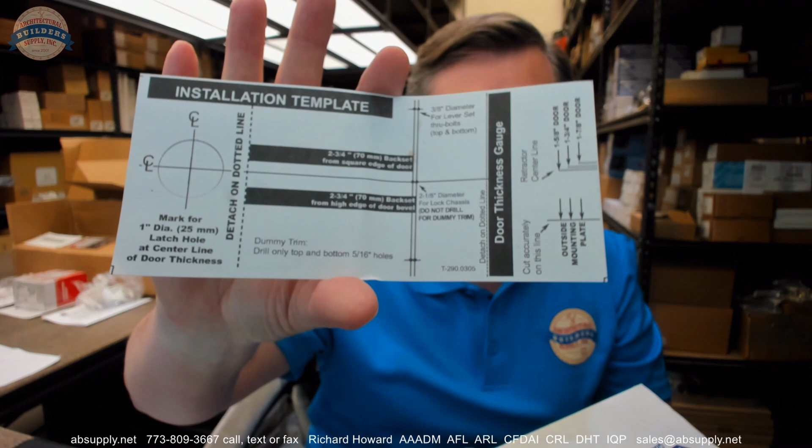So coming out of the box, we have installation instructions and a template. I had put that template into the scanner so as to get it attached to the extended description. We're going to go over all the paperwork, in fact.

So, of course, the business end of this lock. This client ordered this lock less cylinder, so there's no cylinder installed in this lock. Specifically, less cylinder.

Grade 1, which means it has passed 1 million cycles. Lever action seems to be pretty good. Comes back.

Interior as well. Obviously a cylindrical lock, meaning that you have a round hole drilled through the door, with then a hole drilled in the edge of the door for the latch bolt, and a cross bore hole.

This is a lever lock, and it is a cylindrical lever lock, so therefore it's going to have the through bolt holes, as you can see here and here at the 12 and 6 o'clock position. That's because you can really generate a lot of rotational torque on the lock itself. Without those through bolt holes, you'd be able to really get a lot of movement and bending. The latch bolt wants to stay straight, but that body wants to move. So those lever through bolt holes keep that operating healthily.

2 3/4 latch bolt. Lots of information stamped on the front of that.

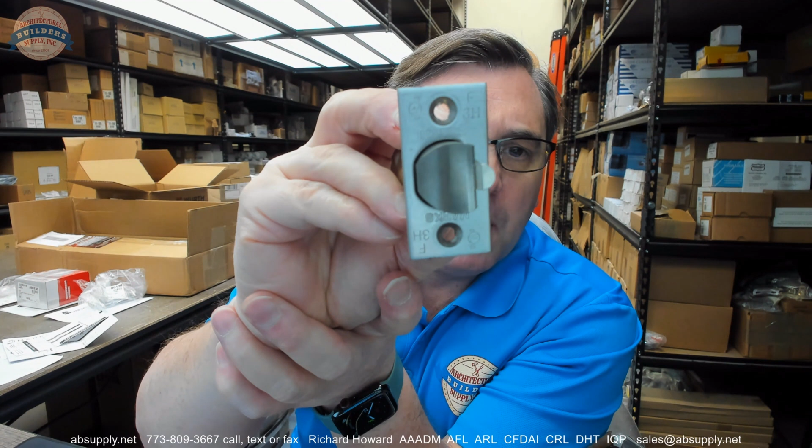There's the UL in the upper left-hand corner — it is, because it's on its side. Upper right-hand corner is the letter F. That stands for compliance with positive pressure. This has been tested in a fire door application and is compliant with positive pressure. I know it's positive pressure because it's the capital letter F. If it was a lowercase f, it would be neutral pressure.

3H, I can only imagine that means 3 hour. And the Marks logo is there as well.

All of that is really important to know because the annual inspections of fire doors and egress doors in certain occupancies are now mandated in code. That comes from the NFPA standard, the NFPA 80 and NFPA 101 — NFPA 80, the fire standard. If that standard is adopted by your local building code, it becomes code. So in certain occupancies, the building owner is obligated to have their fire doors inspected annually.

This information on the face of the latch bolt is where the manufacturer puts the visual evidence to anyone looking at the lock that says this lock is compliant with the requirements of this door needing to be fire rated, to a certain degree, whatever that degree is. A 3H — I've never seen 3H, but I'm just going to guess it means 3 hour again. That's a 2 3/4 latch bolt. Nowhere on here does it measure 2 3/4, but we'll go over that when we get to the template.

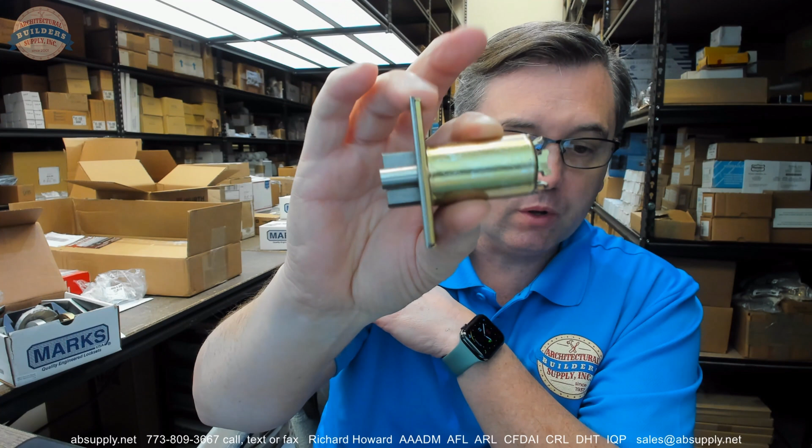That is a 2 1/4 inch tall and 1 1/8 wide faceplate.

This is what's called a deadlocking latch because when the deadlocking tab is depressed and held retracted, the latch bolt cannot be easily forced, and that also helps ensure the hardware can pass the fire test. The installation is obligated to look like that. That keeps that latch from falling back where it does not belong, so keeping the lock mechanically engaged into the strike is the other purpose of that deadlocking latch.

Okay, now let's continue on with a tour of this lock. Let's take another look at the strike plate that is here.

What's included here is what would be called an ANSI strike. That means it's going to fit into a hollow metal frame. Hollow metal frames with an ANSI strike prep will receive this strike plate without any trouble, and that's 4 7/8 by the way. You'll also see these installed in wood frames — it's not unusual to do a commercial project with wood frames, and having an ANSI strike is typical.

Okay, we've got our latch bolt - seems like a nice quality latch bolt. Now what else? We're just going through the parts in the packaging. You're going to have your interior rosette, which appears to be stainless steel. A package of fasteners and a couple of tail pieces. Those might be included with the thought that you're going to stick some other cylinder into this.

Let's back up - you need to insert a cylinder into this lock. It doesn't include one. They've included a couple of tail pieces that I believe are defined in the installation instructions, so you might be sticking in your building's keying system, but using a Marks lock with some other manufacturer's cylinder. There's a tremendous amount of cross-pollination these days. Many years ago you didn't see every major lock manufacturer make cylinder platforms to fit in other people's locks, and I think that's a good thing because it allows us to divide the lock and the cylinder technology apart from each other.

What that means is, let's say your building - no one is related to Marks in the sense of other companies I'd mention - but let's say you had a Sargent. I'm working on a project for a client now, a Sargent Keso system. It's a dimple key system, a high security keying system, and you've got Keso installed everywhere. Someone says, why are the locks so expensive? I'm just making this up - well, because this and this. Is there any way to reduce the cost? One possible way is to keep your Keso keying system in place and use another lock that will take the cylinder you want to insert into it. I don't know if Keso will fit into a Marks - I imagine it will, but I'd have to research that.

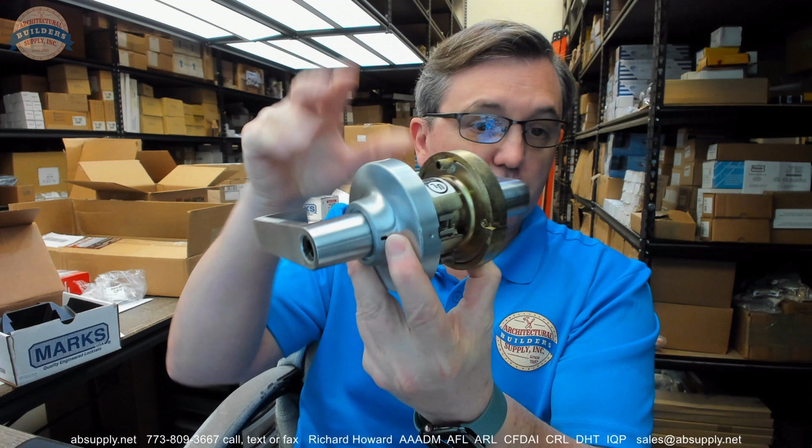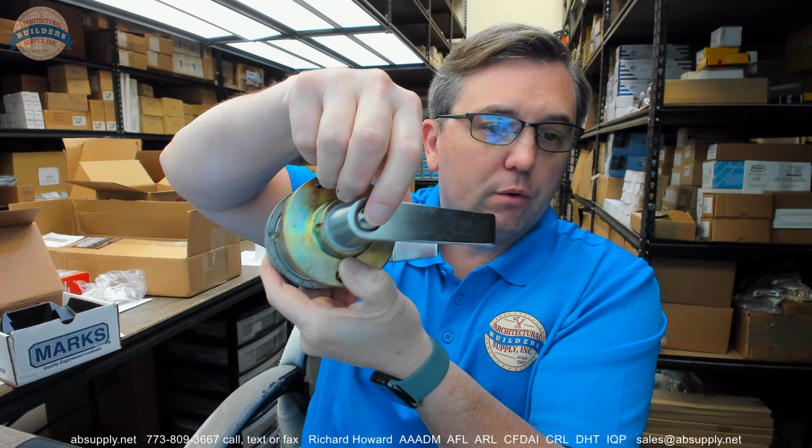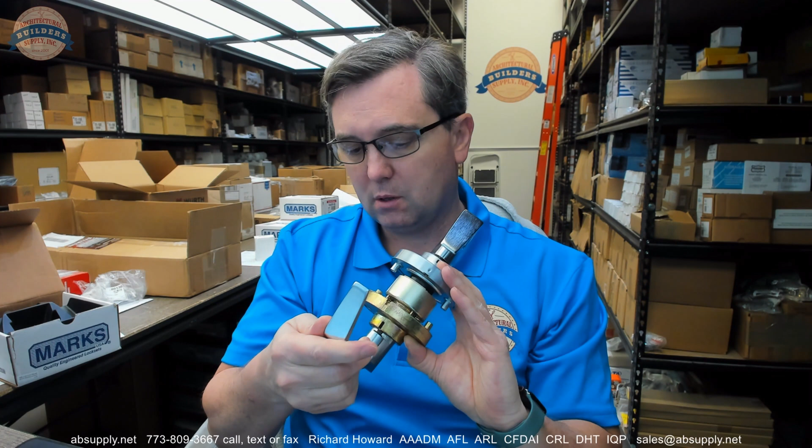Okay, so this lock is again a grade 1 cylindrical lock. This is their 195, their Survivor series - that's just the marketing term for it. It's an A-B function, and we're going to look up what that function means, but it's certainly an entrance function, and we'll go over what that means. This is in 26D, satin chrome. They're probably zinc die-cast levers would be my guess. What that means is the levers will be non-ferrous, dense, heavy because they're dense, and take a reasonably nice finish. I don't know that they're made of zinc, but I'm sure they're not brass - non-ferrous, obviously not solid brass, and not stainless steel would be my guess as well. They're clearly not steel. What I don't know off the top of my head is what the G3 stands for.

G3 - let's take a look and see if we can determine what that means.

I actually needed to call the factory. G3 is the code for less cylinder. So the installation instructions are going to talk about how to get this onto your door. Let's start this video with just being naturally curious and not looking at the installation instructions first.

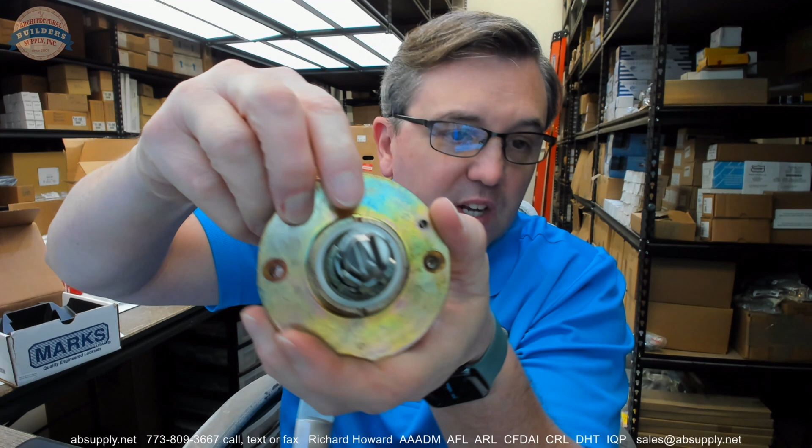Which is always a good thing, but when all else fails, look at the installation instructions. So our lever removal tool, cylinder removal tool, that's going to go into the base of the trim, and I'll be able to remove that lever as a result. So what we're doing there is we're depressing that spring-loaded tab at the tip of my finger through this access hole, and as I push that down, it's spring-loaded, I will be able to pull the lever off.

At this point, all of this, the inside rose mounting assembly will come off. Now, inside of this is going to be the spring cage. I don't see anything that tells me that this piece is handed at all. It appears to be able to go on in either orientation.

Just being naturally curious about the item, it appears to be non-handed. What's going to be in this inside assembly, of course, will be the spring pack that is going to allow the lever trim to actually operate. So the springs are inside of here. I don't know that they are replaceable at all. The fact that there are 2 screws here tell me that they may be able to, and in certain other locks you can most definitely replace those.

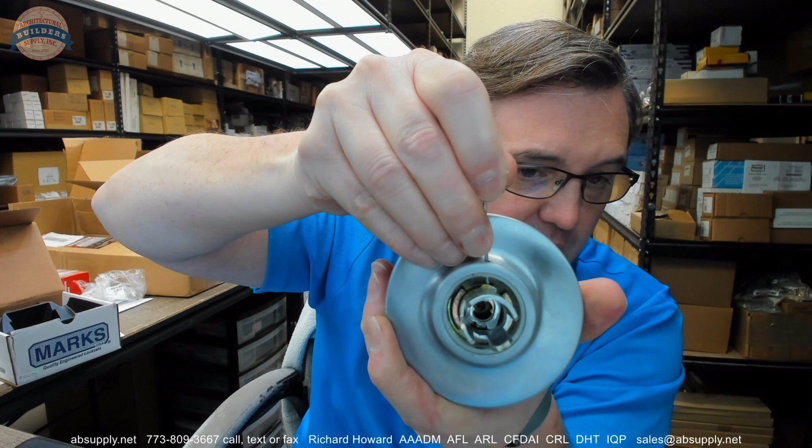Okay, we'll pull that outside lever off. Also, where they will certainly diverge is how to adjust for door thickness. So that exterior lever, it comes off by the same principle, just pushing our pin tool down through the access hole, and then getting that tool on top of our spring-loaded tab, depressing it, and that will allow the lever to come off.

But it'll only work all the time when the cylinder is not present, or I should say the tailpiece is not present. And when the cylinder is installed, you need to actually rotate that key in order to make room to press the tab. So the tab, when you push it in, it'll move. Let's do this. Okay. When the tailpiece is there, it can't move. When you insert the key and turn the key, now it's got enough room to move, allowing you to pull the trim off.

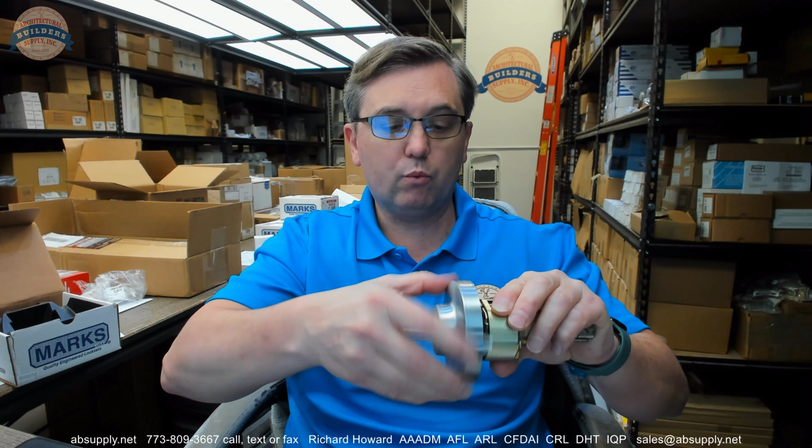So we have basically removed our interior lever rose assembly, our interior lever, obviously, our exterior lever. At this point, I can see that that's threaded, and adjusting for door thickness is certainly going to be discussed in the installation instructions. So we have this disassembled to the point where we can certainly switch to the screen view and take a look at the installation instructions, and then go over that. Let's pick up with that now.

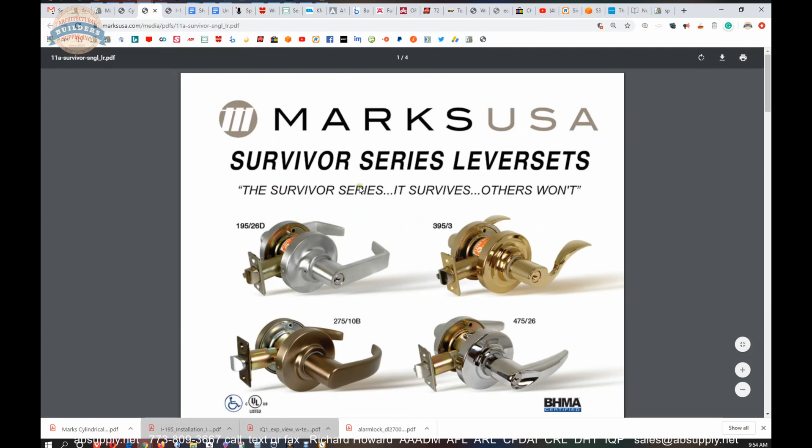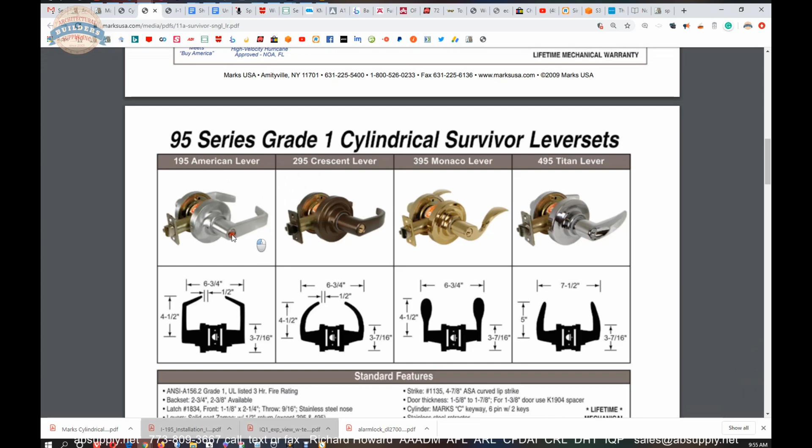Okay, so here's the item that we're looking at, and then we're going to come over here to the installation instructions. Actually, let's look at all the supporting documentation before we get to the installation instructions. That's going to be the product brochure first, which will be here and down below. So the 195 is going to be a reference, of course, to the lever design. They're calling it the 195 American lever, or maybe the 1 lever, I suppose. Grade 1 95 series American lever. I'm not sure how they dissect that, but so that's what we're dealing with.

At the beginning of the document, they're just showing 4 different levers and 4 different finishes, an exploded view of this very simple lock set.

There's no doubt that plastic bushing that is here, embedded in the interior rose assembly. There's no need to pull it out at all. I don't see why you would attempt to.

The inside lever has the cylinder retainer in it. You don't need to take that out on the inside at all. You would on the exterior when inserting your cylinder. The rose cover includes the plastic bushing and the spring-loaded interior rose assembly. Those 2 longer bolts in the bolt package go through the door preparation into the tapped holes of the posts in the exterior rose assembly.

You have your chassis, what they call the lock body assembly. That's the business end of all of this. Your latch, your retractor hub that's inside here, connects the latch bolt to the chassis assembly.

There is a split spacer ring, a black ring down inside the lock, visible when you rotate the exterior rose assembly. I don't see any reason to play with that or manipulate it at all at this point, although we may need to when we go to adjust our thickness.

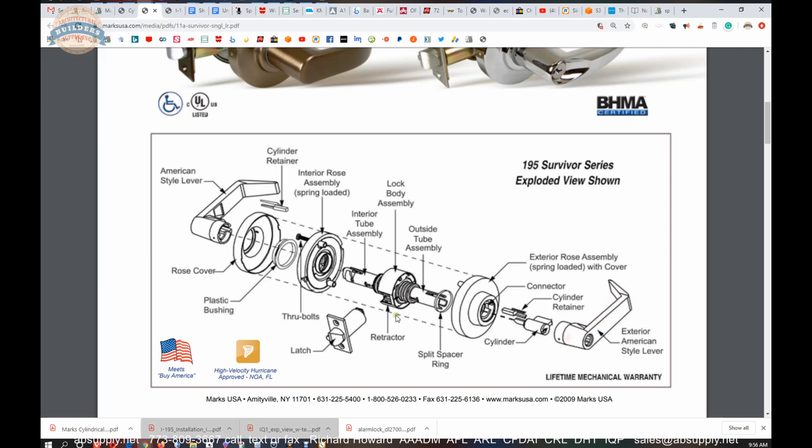Meets Buy America Act, it's BAA compliant. Doesn't mean it's made on domestic soil, but it's compliant with that requirement. It certainly means that parts of this, or all of this, are made in a country that, like Taiwan I believe, would allow compliance with this.

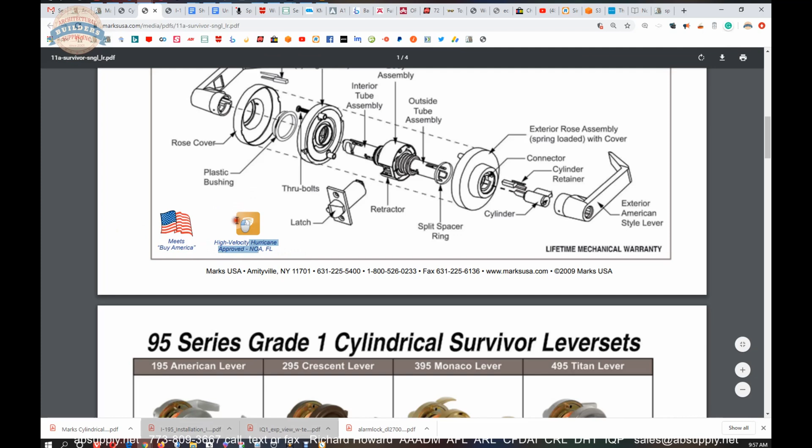If you're down in Florida, this is a part of every door you do. High velocity hurricane approved. Doors, frames, hardware, all of it has to be compliant.

The dimensional properties of the 4 levers that are available: American, Crescent, Monaco, and Titan. Of course, the American lever with that return back to within a half inch of the face of the door is incredibly common.

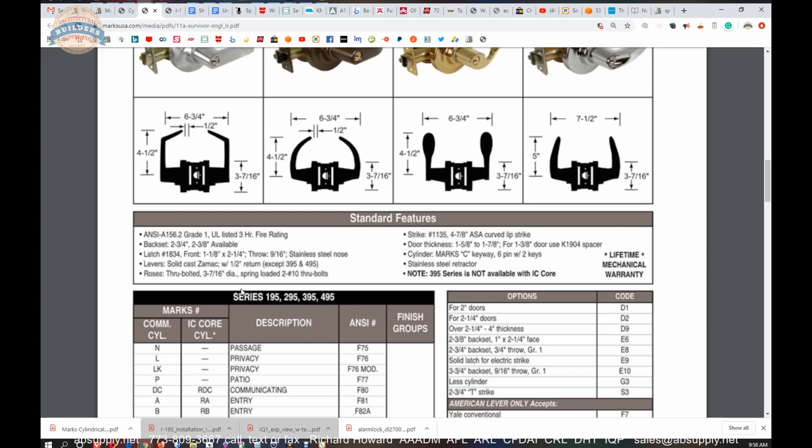This is an ANSI A156.2. The A156 is the series of documents that pertain to hardware. The .2 is the actual publication from that series, indicating that this is indeed a grade 1 UL listed 3-hour fire rated unit.

2 3/4 and 2 3/8 are available. The latch, I didn't show that to you earlier. The latch plate itself moves, it floats. The front of that latch floats, it's a floating latch face to accommodate square edge or beveled edge doors, or why that's like that.

I was right, the levers are made of Zamac, a material that's die cast. I think elsewhere it may say zinc die cast, with a 1/2 inch return, except the Monaco and the Titan, they don't feature that return.

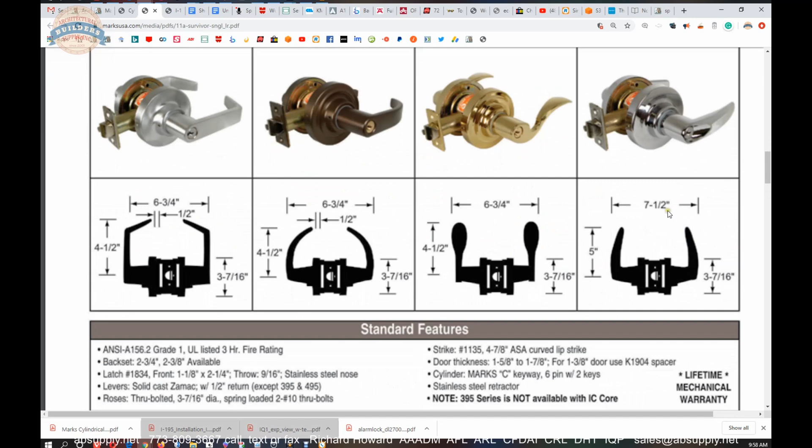Roses are through bolted, 3 7/16 diameter, spring loaded, 2 number 10 through bolts, probably a 1032 would be my guess. That strike is an 1135 4 7/8 ASA curved lip strike. They don't indicate other strikes are available, but that would only explain why there's other screws. It must be a generic screw package.

Door thickness is going to go from 1 5/8 to 1 7/8, so a relatively narrow range of door thickness. This K1904 spacer, probably used in multiples of 2, will likely be a piece of black plastic that sits underneath each rose assembly, spacing the door out evenly. The reason you need a range of thickness is because 1 3/4 doors, when you put a caliper on them, they're not 1.75, they're a little bit thinner. A fire door is going to be 1.71. A door with plastic laminate is going to be definitely thicker than 1 3/4. So that range is there to account for that.

Cylinder, if it came with one, would be the typical Marks C keyway. I'm sure that's just an SC4 or a Schlage C 6-pin, like a 35101 would be the Schlage original blank for that. Stainless steel retractor, that again is the item that pulls the latch when you operate the lock.

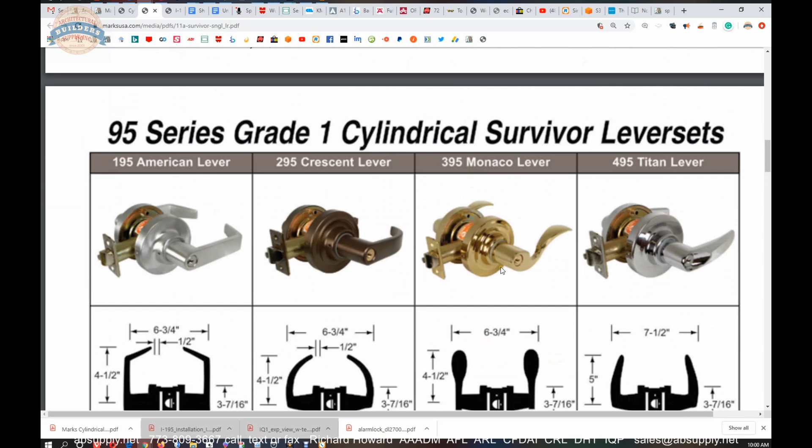The 395 series cannot be supplied with an interchangeable core. That's probably just a limitation of the design of this lever. There's just not enough room back here like there is on the other levers to get that installed.

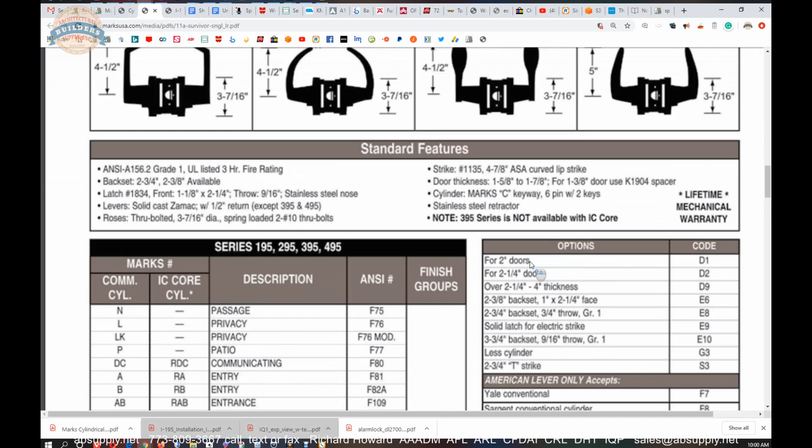Now the functions, we had talked earlier about the functions. Oh yeah, G3, it's right there, I looked too, less cylinder. So we have an AB function, and that's entrance, that's also an F109. F109 literally means that if you were to look in the catalog of any lock manufacturer, they will always have the ANSI number, where an ANSI number applies. It will apply with an F109, that means it's an entrance function. That's really a triple function lock, meaning it has a push and turn button. Let's switch back to the camera view and take a look at that.

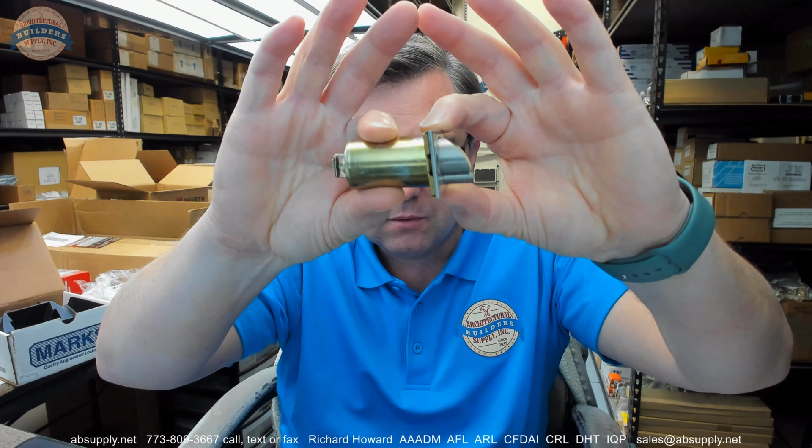Before we look at that push-turn button, that floating front is by design, to accommodate square edge or beveled edge doors.

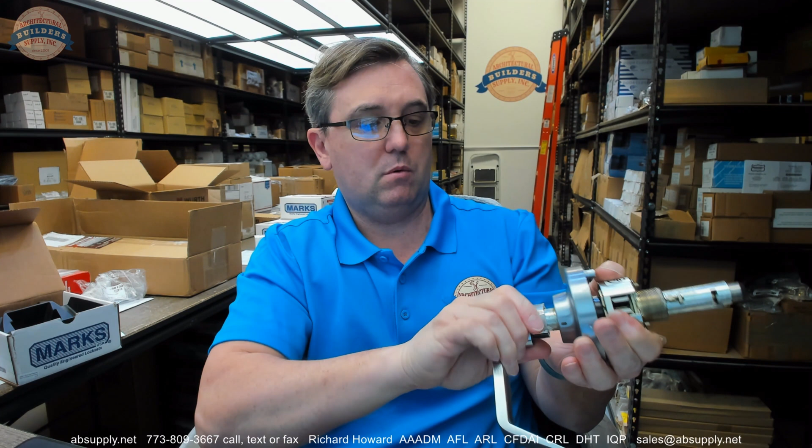Now the triple function latch. Right now we've got a button. When the button is popped out, each side is unlocked. I can rotate my levers on either side and it's going to work. That's the inside lever. I was thinking it would go in far enough, but it doesn't. Okay, the inside's unlocked.

The outside is unlocked. That's just a passage function, is all that is. If I were to push the button in, the outside is now locked, although it has a clutch happening, but it's not retracting the latch bolt. That's locked.

As soon as I push the button in, outside is now locked. As soon as I do one of two things, I either push the door closed—actually, I don't know if that's going to work. Let's test. No, it does not, unfortunately. That's unfortunate. There are some locks that if you were to push the door closed and depress the latch, it will pop the button out. It doesn't on this lock. I wish that it did.

What that solves is someone pushing the button, leaving and pulling the door closed behind them, locking the unit. I would want that to be unlocked, because you'll have people unintentionally lock the door.

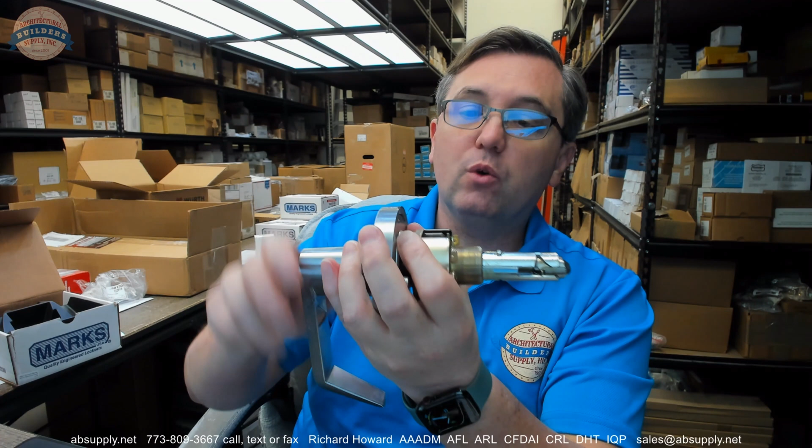So the only way to... outside is locked when I just push the button. When I rotate the inside trim, it pops the button out, making the unit unlocked. So that's what's called an office function.

The third function is a push and turn on the turn button. Outside is always locked, inside is always free. Outside always stays locked. So that's your triple function.

In the history of lock functions, the entrance function hasn't always existed. You can go back and look in an early 1970s Schlage catalog, and you will not find an entrance function. You'll have other functions that did similar things, but not a single lock that did all three. And the entrance function is incredibly common.

You can leave it unlocked, you can leave it always locked, or if you wanted one-time use, just push the button only. It's an office function in the sense that you're in your office and someone comes in and the button is pushed for privacy. As soon as they leave, that door is unlocked. That's the purpose of the push button only.

So let's switch back to the screen view and continue looking at the product brochure. We've talked about at length what the entrance function is, and what's nice is you can see in this grade 1 cylindrical lock a tremendous offering of functions, at least two dozen. That's the letter and the part number.

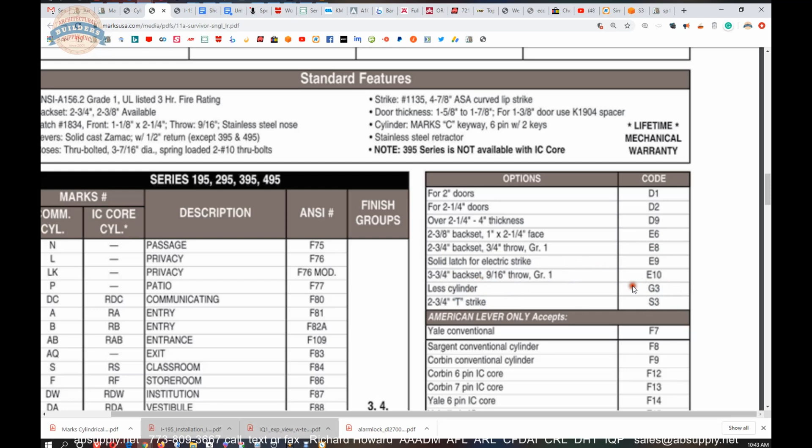So you need to order that E8 code. Solid latch for electric strike—you might need to be installing this with an electric strike, and at that point you're probably going to ditch the deadlocking tab. 3/4 latches are available, less cylinder, that's our G3. And if you wanted it with a 2 3/4 T-strike, S3, that indeed is why those extra 2 screws are in the packaging.

Now here are your cylinders. You're going to want to indicate what core you're using. So if you indicate that RAB, you're going to want to indicate what IC core you are using. And obviously they need to know that in order to prep not only the lever but the rest of the assembly accordingly.

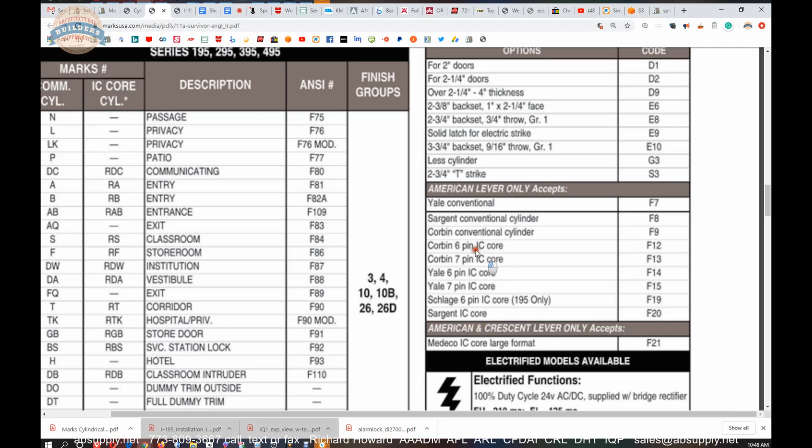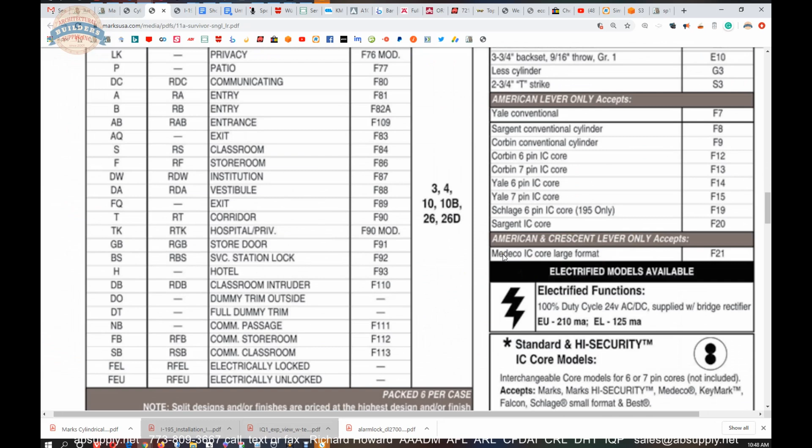And that American lever, because it's such a generic design, can take all of these different cores, plus it's going to be the most common model. Now they do list that they can do in the Crescent as well a Medeco interchangeable core. Okay, electrified functions are available.

You're going to order an EU or an EL, electric unlock or electric lock. These are the milliamps that each are going to take.

Standard and high security IC core models, interchangeable core models for 6 or 7 pin cores, not included. They can take high security cylinders by these other folks. Apparently Marks has a high security cylinder. I'm not familiar with it, but apparently they do.

Medeco, obviously. Keymark is Medeco's small format cylinder. Falcon, I'm not sure what Falcon's high security cylinder is. Schlage, which would probably be Primus, small format Schlage, and then Best, that would obviously also mean Arrow clones of Best small format.

IC core tailpieces are included, so that's good to know that you don't have to go out and buy that. Or, forgive me, you get the lock, you've got your own core, but you're missing the tuning fork, the tailpiece.

So this 75 series are grade 2. We're just going to scroll through and past all of that.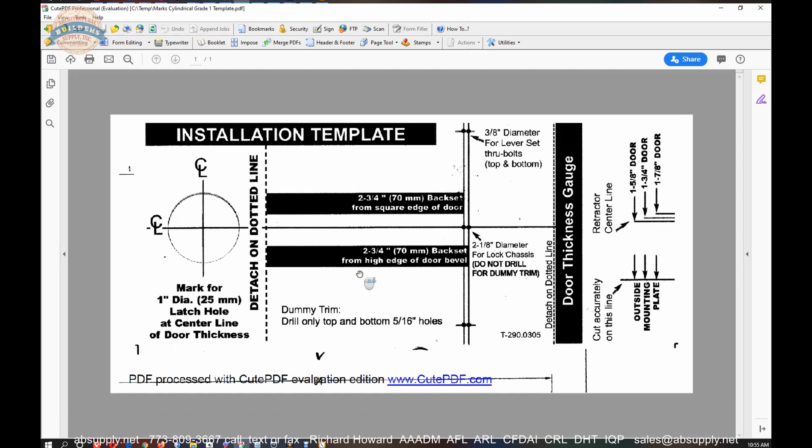Detach dotted line - well, I wouldn't detach it, I would fold across the dotted line. Fold it there. This is going to be the edge, from the edge of the door to the center of the hole. That's where you're going to - and obviously this is not to scale, that actual template is probably that big. I just have it looking larger for us. So when you fold that over, you're going to mark the center of the door and drill your 1-inch hole.

But first, you're going to go from the edge of the door 2 3/4 back. Now you'll see that there are 2 dots here. Well, they do a good job with this, and what I mean by that is, if your door is square-edged or beveled, makes a big difference. So where you're going to prep the backset of your door has everything to do with whether or not that door is square or beveled, because backset is measured from the center of the thickness of the door. From here over, or here over on a square-edged door, it doesn't matter.

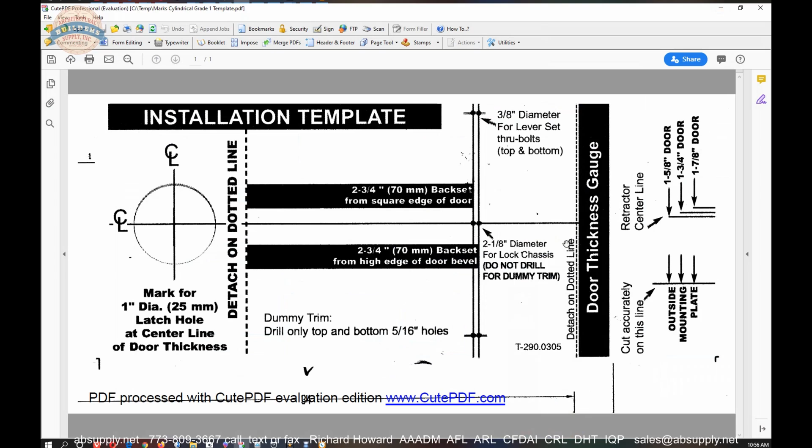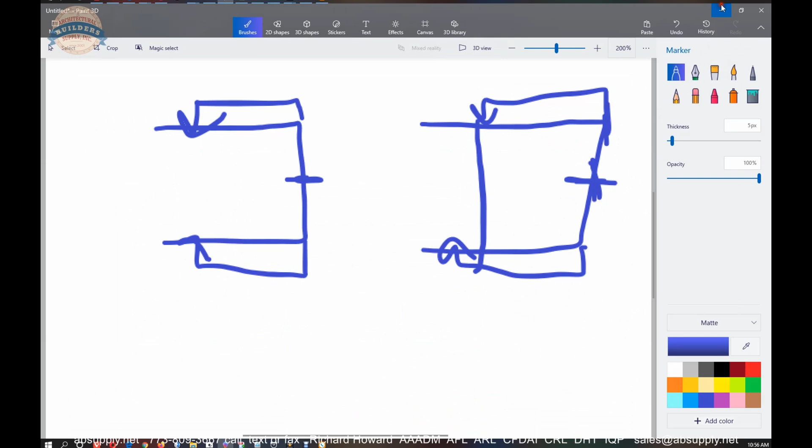It does matter if you're dealing with a beveled edge door, because 2 3/4 measured on either side is a different dimension. So to compensate for that, if you have a beveled edge door, from the high side of the door, which would be the pull side, you're going to use the hole further away, because you're naturally referencing from further away than you are here. So be mindful which of those 2 holes you use. If it's a beveled edge door, use the outside hole, applying the template to the pull side of the door.

If it's a square edge door, you do it from either side of the door and you're in good shape. What's nice about this template is they also give you the location for those holes for the through bolts. So if you're dealing with a wood door, I would use a spring-loaded center punch, place my template, tap tap tap tap, and I'm done. My holes are now marked.

I'm good to go. The issue, however, is that this template would be better if they had a third line, because now I want to take this template and go to the other side of the door and mark my same holes, because I don't want to drill through the door - I don't think anyone would ever drill through the door. So that would be a better way to do that, and I would recommend they modify this template, clean it up a little bit somehow.

But at the end of the day, you just need to read the information. So now we've talked about the template that's included with the hardware. This discussion won't go into how to prep the door, whether it be a steel door or a wood door. If you need extended discussion on how to do that, call us up and someone here will walk you through that process.

Now let's move on to the installation instructions. Okay, so we've gone over the template. Now let's move to the installation instructions. This sort of lock, and there are some grade 2 cylindrical locks where the through bolt holes are optional, but you really never want to. You don't want to install it without through bolt holes ever.

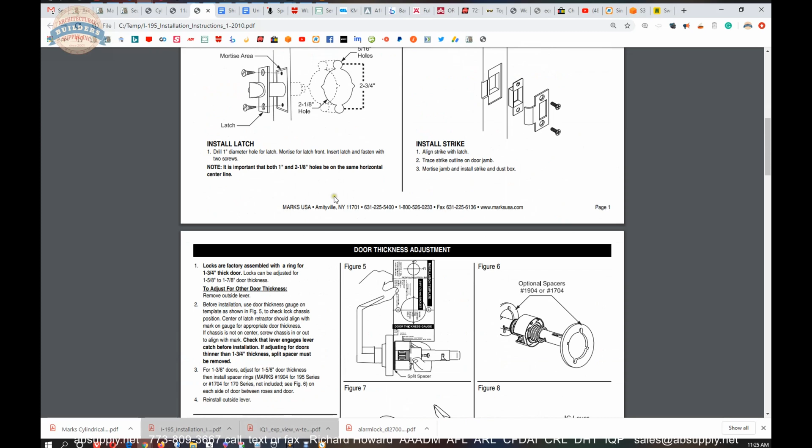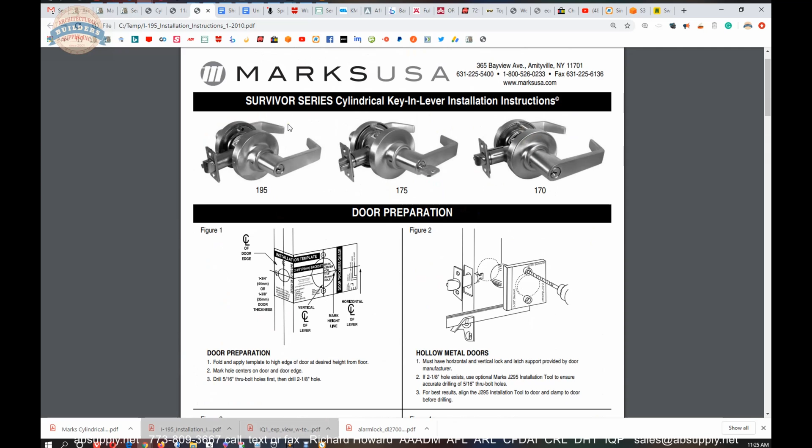Some people have gone out of their way to literally cut those posts off. On those models where you can still install it, the trouble is with this grade 1 by Marks, you would not be able to get the lock installed without those through bolt holes. So that's a good perspective, looking at it from an engineering set of glasses, so to speak, because it does 2 jobs. You have to have the screws to attach the lock to the door, and having those through bolts are part of the way it was tested.

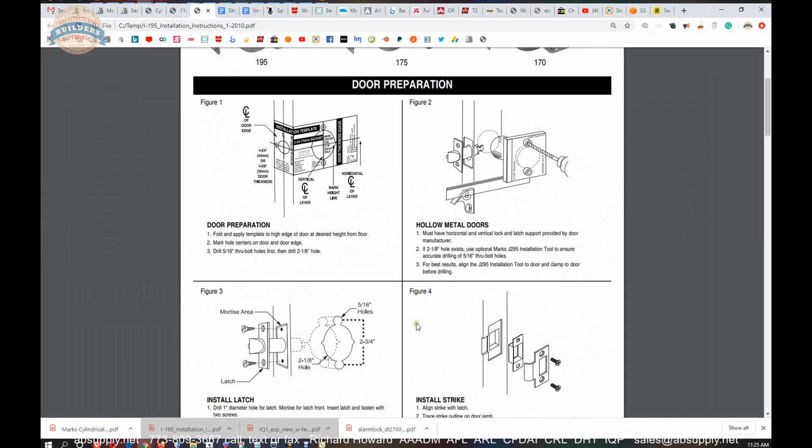I believe there was some conflict though - 5/16 holes, and I'm quite sure that template said 3/8. Okay, I'm going to go with 5/16. I believe that 5/16 is accurate for those holes.

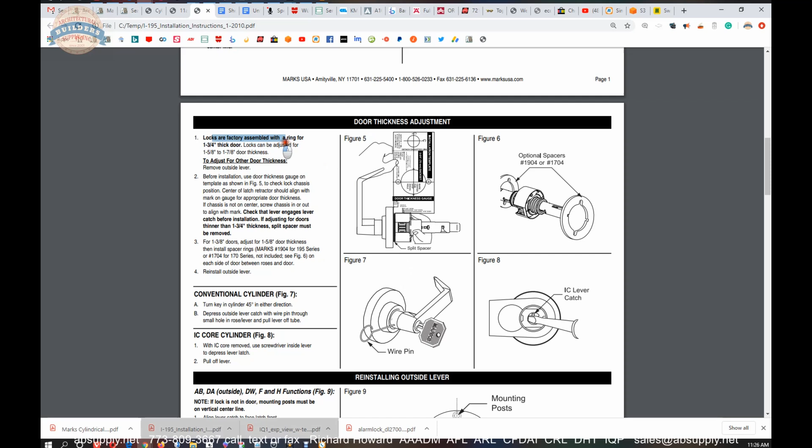Door thickness adjustment - now that's done with the template and the lock, and this is where you do need to get that set before you install it, because this is going to come from the factory already assembled for a 1 3/4 thick door. Don't change anything, it's for a 1 3/4 thick door. And what we'll do is we'll switch, and that is what that reference to that split spacer was earlier.

So let's switch back to the camera view so we can take a look at the adjustment part of this and how to use it with this template.

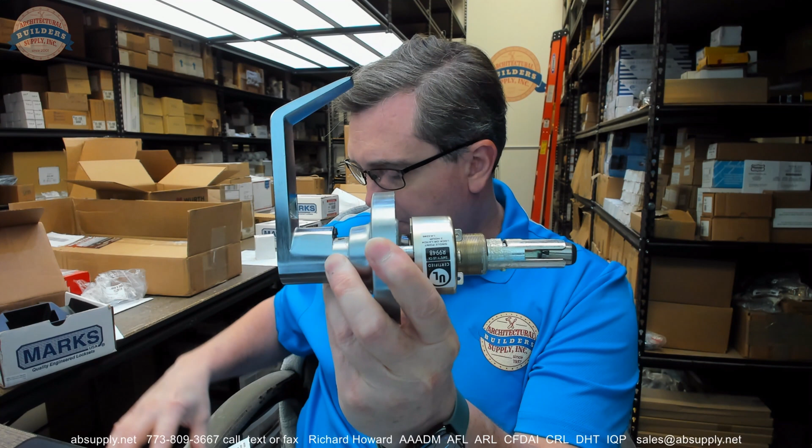So in those installation instructions, when you look at figure 5, they're going to hold that lock up there, and really all they're saying is the center line - well, they're showing it to the retractor, but the center line needs to be along that outside mounting plate. And yeah, it's to the center line. That's all there is to it.

Okay, now that's because we're accomplishing that by threading the chassis. That's in here, so we would be able to thread that to adjust our thickness of our material.

And I've removed the outside lever so we can take a look and see how we just simply thread that. And that's that split spacer that's in there. You'll just simply rotate that. It doesn't move very far, but it does say for 1 3/8 doors.

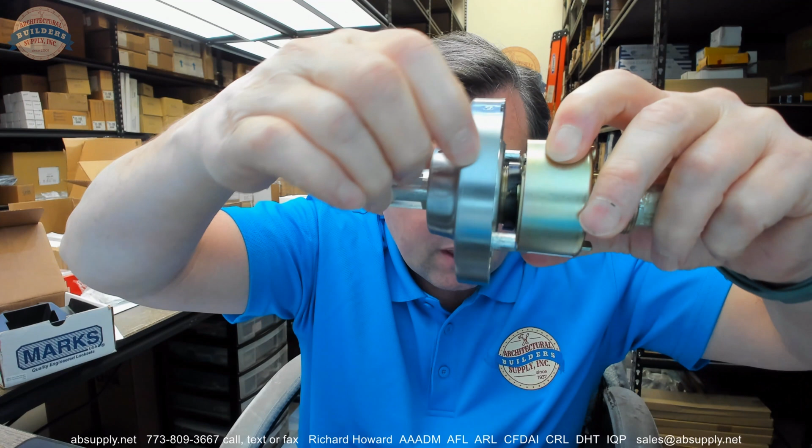For doors thinner than 1 3/4, you need to get in there and pull that split spacer out, and it is split right there. So you need to get in there with a tool, maybe a needle nose plier, pinch that, grab it and pull it out, then thread your unit back in.

That's what you'll need to do to get that to work. Now, if it's a 1 3/8 door, you'll adjust it for 1 5/8 door thickness, then order those optional spacers, depending on the 1904, which is what you'll use. The spacer for the 195 series. Then reinstall the outside lever.

For a 1 3/4 door, you generally don't have to do anything to the lock—it's already set for that. If you need to make adjustments, reading the installation instructions is a good idea, because locks, cylindrical locks, lever locks differ in how they bolt together, how you adjust door thickness, and how the lever is put back on the stem. How this goes back together with the cylinder can change.

Okay, so now looking at the installation instructions, let's switch back to the screen view so we can continue on.

As we phase back to the installation instructions, we've talked about step 5, step 6. Step 7 is, if you're going to remove the outside lever, you would do that. Turn the key 45 degrees in either direction—I generally rotate it clockwise—to press the outside lever catch with a wire pin through the small hole in the rose lever and pull the lever off. We've demonstrated that.

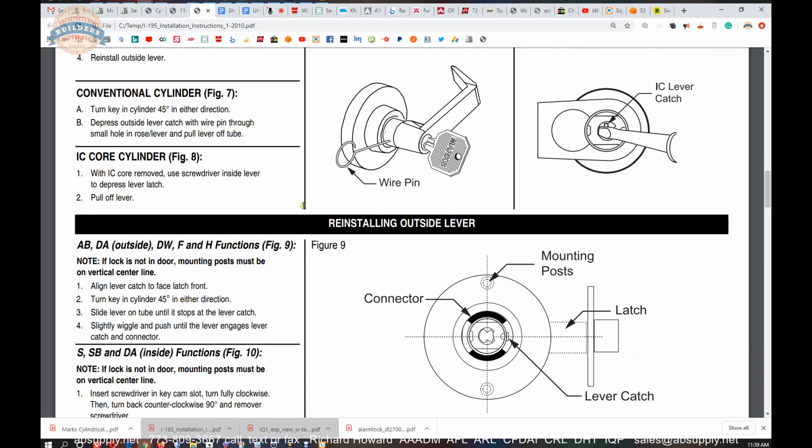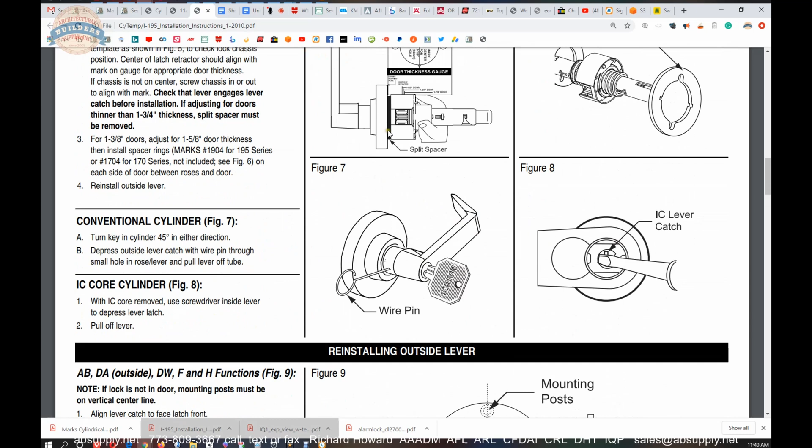If you needed to remove the interchangeable core lever, you could, though I don't know why you would need to—you might just leave that there. It may impact adjusting door thickness. I can adjust the door thickness either way. Well, actually, let's confirm that. I did remove the lever to adjust the door thickness. Yeah, okay, that's why.

You'll need to remove the exterior lever to adjust the door thickness. Okay, that's confirmed, so that's why they're indicating that there. For AB, reinstalling the outside lever—this is one of the three ways I mentioned earlier how a lock could be different from another.

If the lock is not in the door, mounting posts must be on the vertical line. Align lever catch to face latch front—that's the little tab, called the lever catch. Turn the key in the cylinder 45 degrees in either direction. Slide the lever on the tube until it stops at the lever catch. Slightly wiggle and push until the lever engages the lever catch and connector.

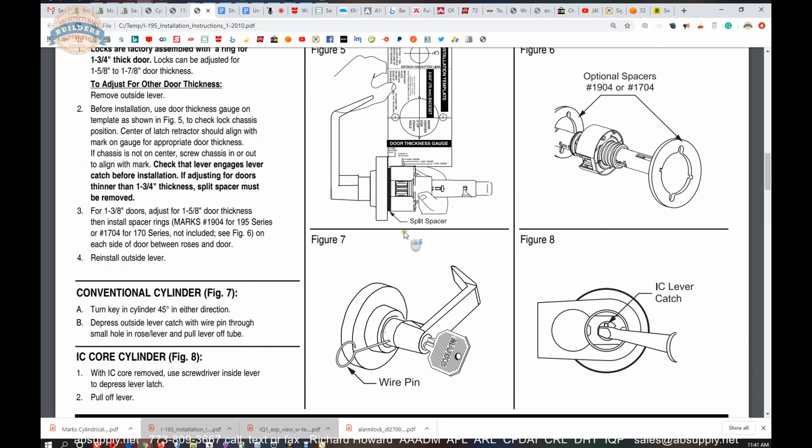So what they're saying is, with the lever in your hand and the cylinder in the lever, turn that key 45 degrees—I'd say clockwise—and push the entire unit down onto the stem until it makes contact with the lever catch. When they say wiggle, exactly that: give it a little wiggle, because you're looking to make the tailpiece seat into the receiver area here so it finds where it needs to go, and then it will pop in.

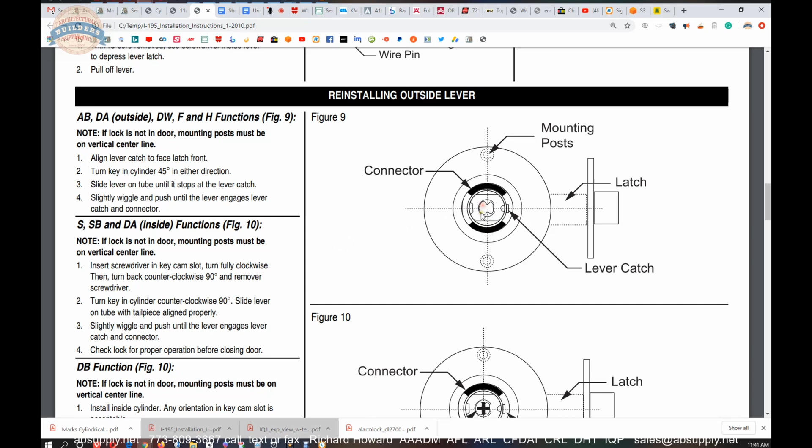When you turn it 45 degrees, again in either direction, you're making it fit in this area, right in here. If you try to go in straight, the tailpiece is going to hit this area and won't enter the receiving area. So turning it on a 45 degree angle is the ticket, so to speak. That's the ticket.

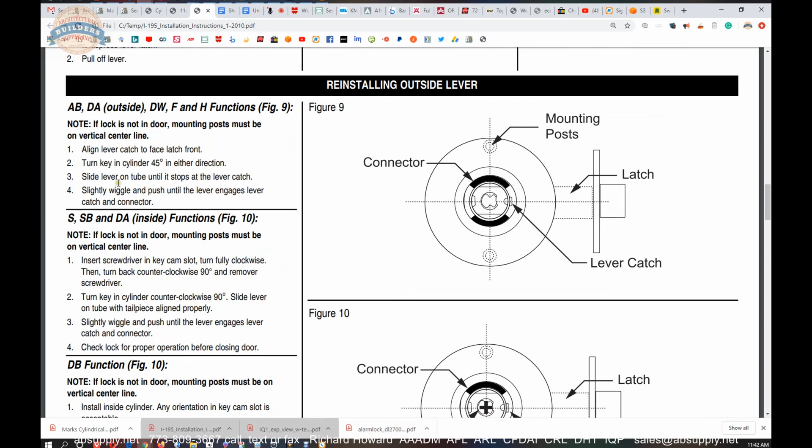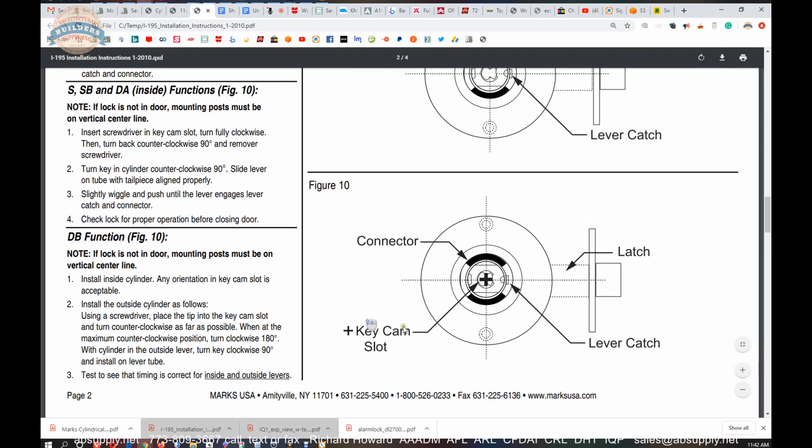We will skip to installing the lock because the other items talk about other functions. Prepare the lock: remove the inside lever. Depress the lever catch with the wire tool that's included, through the small hole in the lever or rose, and pull off the tube, the lever—meaning pull off of the chassis stem. This is the tube.

Then the same—you'll pull off the inside rose assembly by doing that again. But at this point, when you study the lever catch, it'll be obvious how you have to manipulate the inside rose assembly to get that to come off. And indeed, it will need to come off.

Okay, install the lock. Push the lock through the 2 1/8 inch hole so that the retractor engages the latch tail. I don't believe they've said the latch bolt has to be installed first—absolutely install the latch, make sure it fits cleanly into the preparation. Pre-drill your holes should you need to; if it's a wood door, you will.

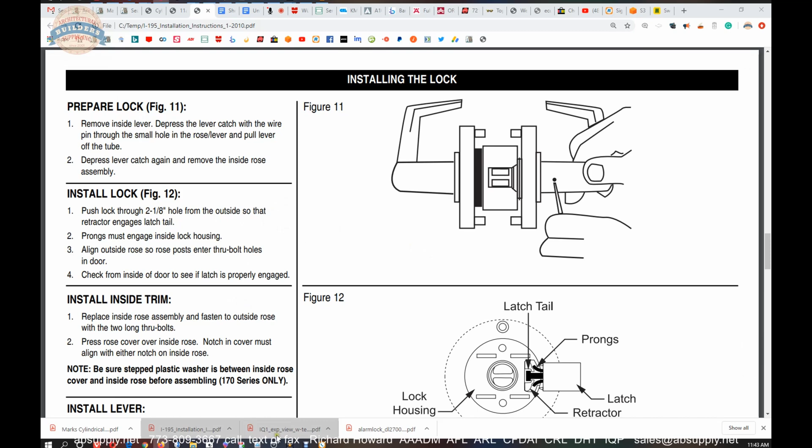When you slide the chassis onto the latch, you need to make it look just like this. The curved prongs need to sit underneath this area here, and that T-profile needs to sit inside of the retractor hub mouth, just like this. At that point, you could put the lock into the unlocked condition and rotate the exterior lever to see that the latch retracts fully.

Push the lock through, prongs must engage. Align outside rose so rose posts enter through bolt holes in the door.

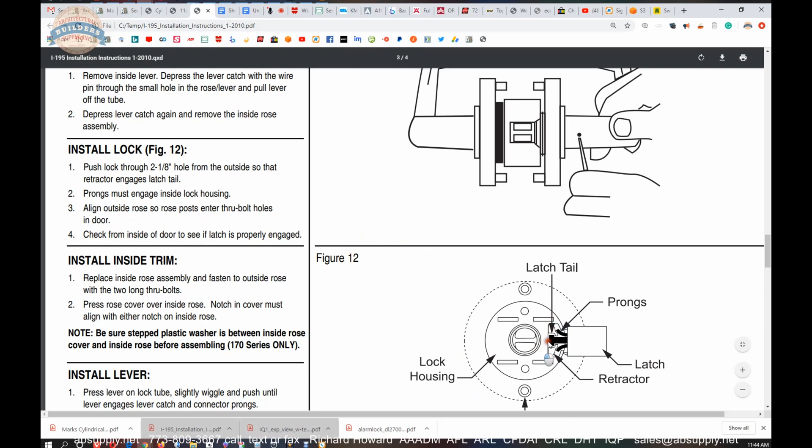Check from inside of door to see that the latch is properly engaged, meaning you're not going to be able to see this view from the outside. You'll only see this from the inside hole, from the hole where the interior lever will be.

Install inside trim, place the inside rose assembly, and fasten to the outside rose using those 2 long through bolts. Press rose cover onto the rose.

That separate rosette now needs to go onto the inside rose mounting assembly. Your decorative rose is what I'm now talking about. That needs to go on.

Then at that point, you're just simply going to push your lever on. But first, be sure the step plastic washer is between inside rose cover and inside rose before assembling. 170 series only. The inside lever is going to have the cylinder retainer in it.

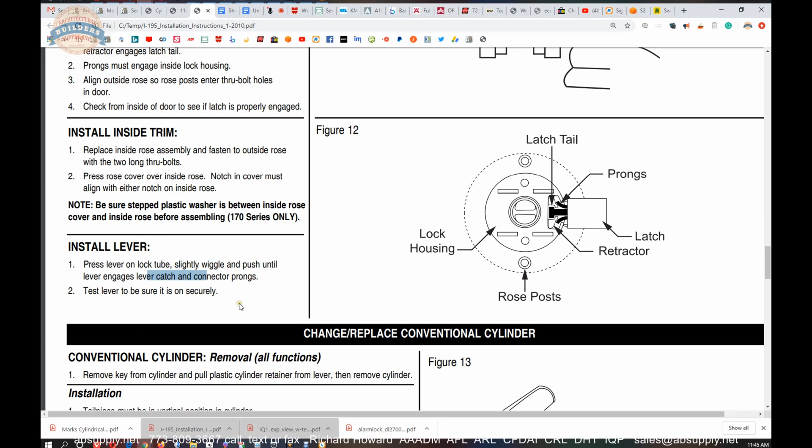Install lever. Press lever on lock tube, slightly wiggle and push until the lever engages lever catch and connector prongs. Test the lever to make sure it's on. Pull on it, tug on it, make sure it's completely seated.

Change, replace conventional cylinder. Let's take a look at that. I won't be able to demonstrate that because I don't have a cylinder with this lock, but let's at least review it. As we move through the change, replace conventional cylinder, this is really going to talk about how to remove the lever.

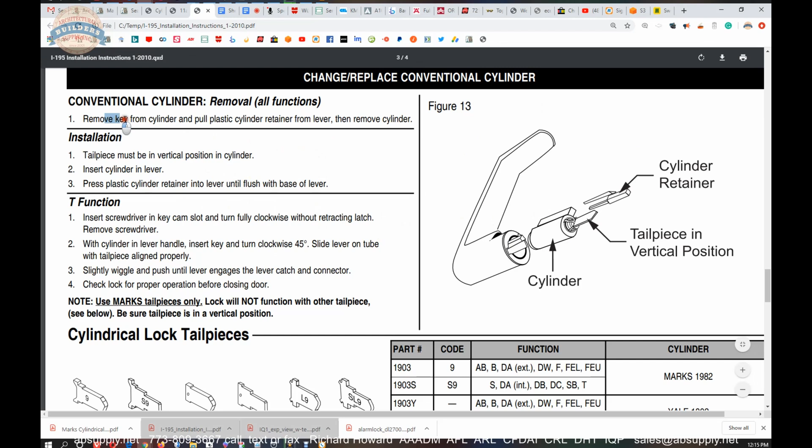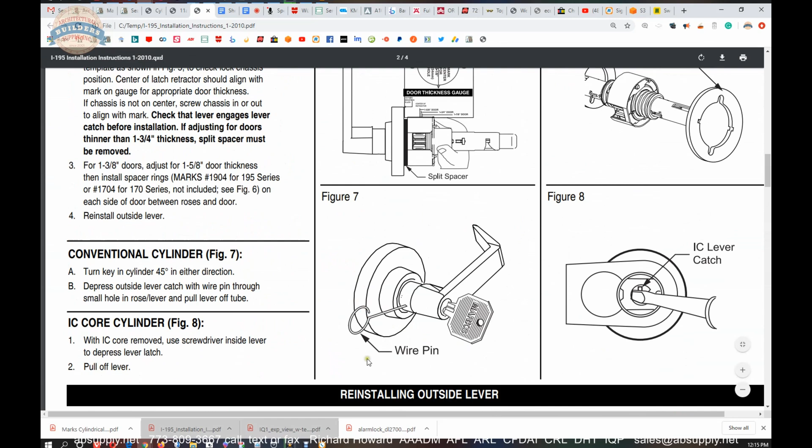It'll initially start with how to remove the lever and its cylinder from the lock. Remove the key from cylinder and pull plastic cylinder retainer from lever, so you've already have it removed. You're going to do that again by inserting the key 45 degrees with the wire pin, and then you'll be able to pull that off. But you have to hold the key turned at 45 degrees while you depress the wire pin. And if you have trouble with that wire pin, and you may have noticed earlier, it is a bit of a trick to get it to seat on top of the lever catch, they called it, which is here.

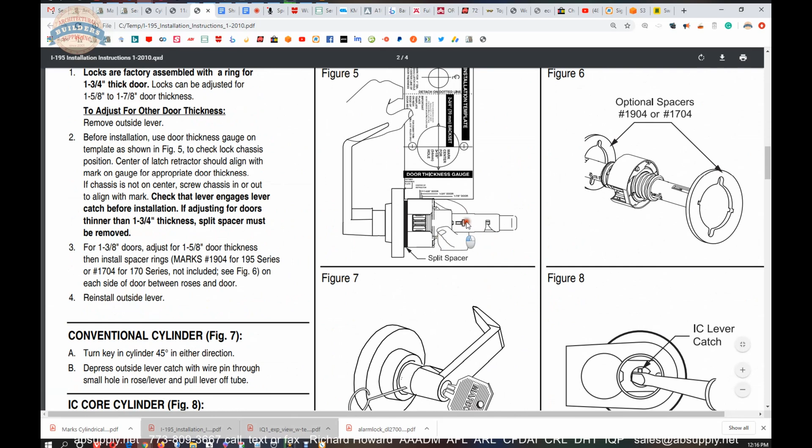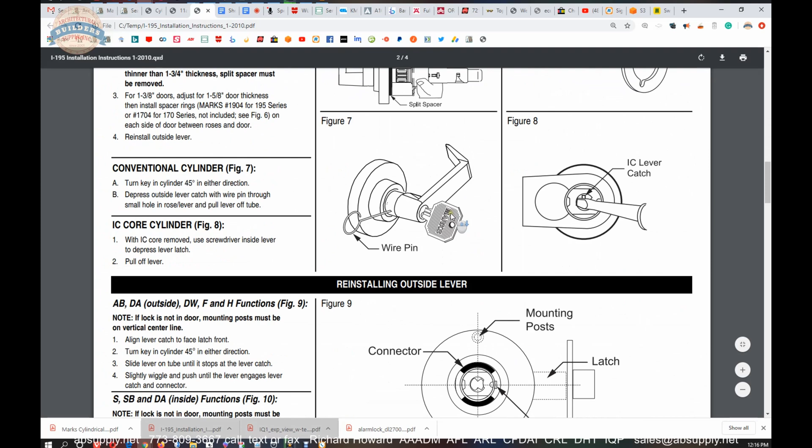You'll feel it. If you push the pin in at an extreme angle, you're just simply going to not make contact with the top of the lever catch. So you want to insert it straight. You need to make contact with that lever catch.

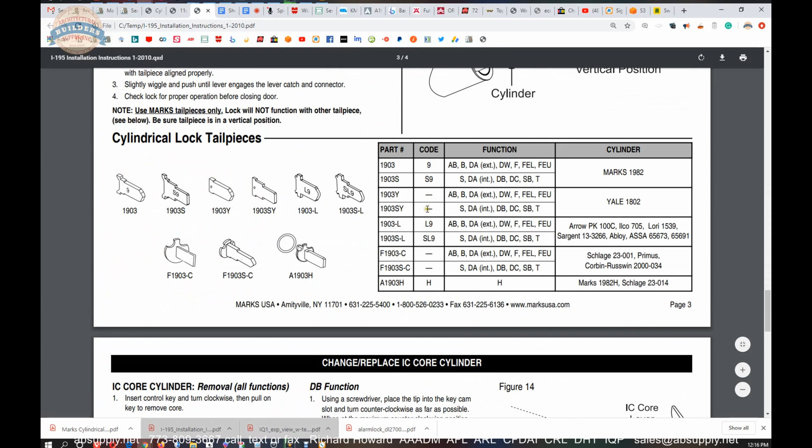So here are tail pieces based on what exactly it is that you're working with. The trouble is these tail pieces, they might be. It didn't look like they were stamped. Let's see if they are. We're obviously going to have in this package the F1903-C.

That's certainly in here. You know, and I would say that you don't need to have tail pieces in here at all. Yeah, the F1903-C is in here. It's not stamped, but what's in here is exactly this. Then the other one that is stamped says L9 on it, so it's a 1903-L, which will be for all of these bad boys, for these functions.

So, you know, you'll be able to do high security right out of the box. Abloy, ASA, that's all high security. Lori, the 1539, that would be a Kaba Ilco generic sort of composite type of construction. And that's that you would need to use their tailpiece to make those cylinders work.

I would definitely be investigating, if you're ordering this cylinder, I would be really mindful of what cylinder you're going to insert into it, because these tailpieces are substantially wider than the average tailpiece. Okay, so you're going to want to make sure that whatever cylinder, if you need to put a cylinder into this lock other than the Marks standard cylinder that you would otherwise get for this, except this client ordered the G3 model.

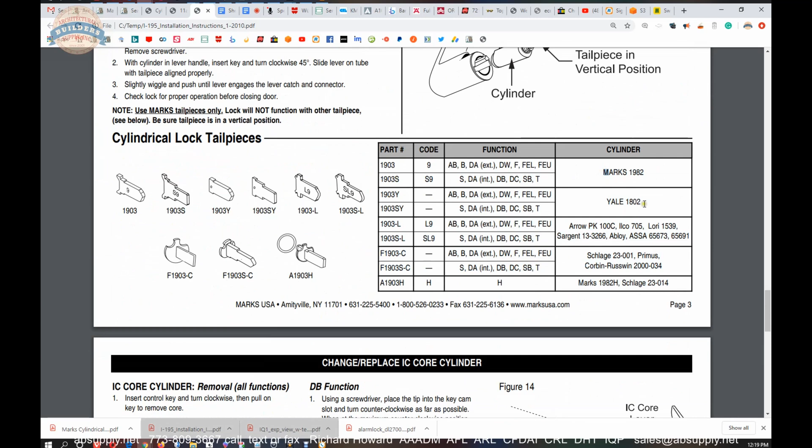IC core removal. These tailpieces need to communicate to the back of the cylinder, and the back of the cylinder with what I called earlier the tuning fork. Not all platforms take that.

The F1903, F19, that's certainly going to be for Schlage. That has a very different sort of linkage between the back of the cylinder and the internal lock components that will ultimately retract the retracting hub.

These spacers are possibly needed if you're installing 6-pin cylinders into a 7-pin prep.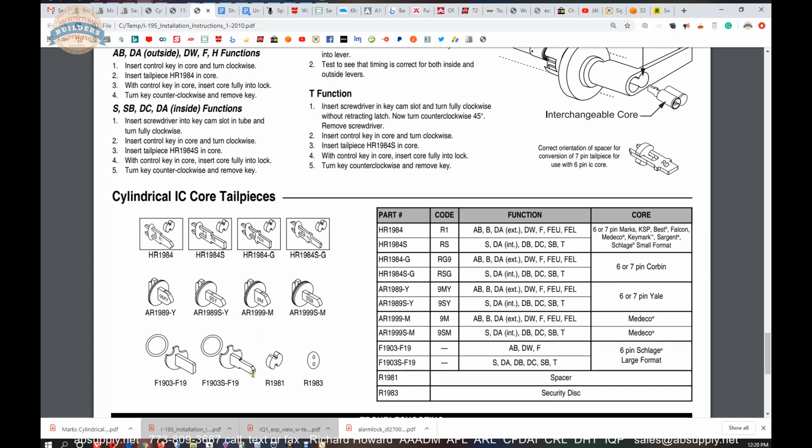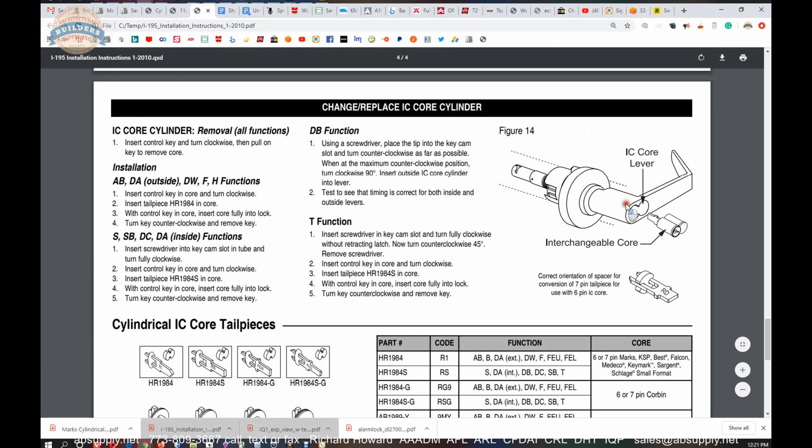Security discs are nice because they fit down into the back of the lock, and the purpose of that is it will block the insertion of a probe down into the broaching of the keyway in the cylinder plug to get back down in there and conduct official shenanigans. So that's what that security disc is for, to block probing through the keyway.

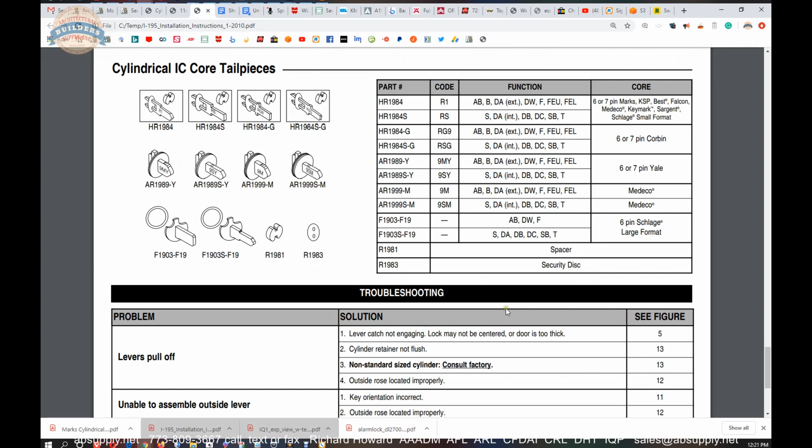So I would recommend that you study that to be sure you're in the clear. Troubleshooting - I've actually never seen a troubleshooting section of installation instructions, and that's really great. I won't read all of those, but if you're having trouble, you might look at the troubleshooting section immediately.

That's where I say always pull on that lock. Make sure it's absolutely seated properly, the levers that is. You don't want to think that it's on and then drive a half an hour away in Friday traffic to get a call from the client that the handle came off in their hand.

Unable to assemble the outside lever, that's pretty typical. When you're just having trouble getting it back on, the parts aren't fitting together. That's where taking a study of the lock helps. And they also refer to that figure number for further information.

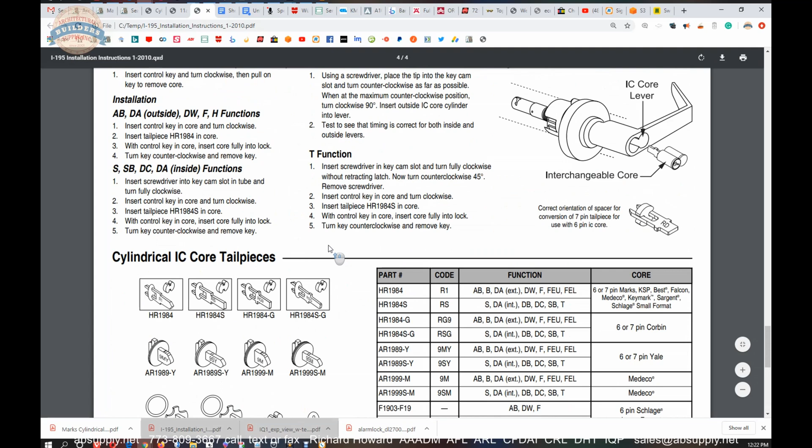Outside lever removable without using key - that could be that the cylinder is timed incorrectly. Without going into it too deeply, if you have a classroom function, which will be an S function, that needs to be timed.

The parts here need to be in the proper timing for it to work correctly. Actually, I was explaining something different. If you cannot set the function of a classroom correctly with your key, removing it, modifying the lock position, and then removing the key, then it's timed incorrectly.

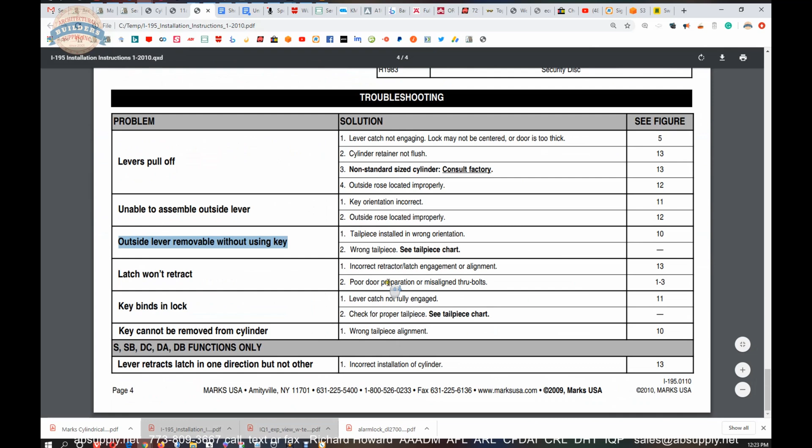What they're saying here is the outside lever can be removed without using a key. That's also a timing issue, because you'll recall that I said the tailpiece, when it's horizontal like this, blocks the lever catch from being depressed because it's hitting the shoulder or the end of the tailpiece.

Well, if you accidentally installed the tailpiece in this orientation, you would always be able to pull that lever catch down. Your lock would work with the key, but you would not have security over that exterior lever.

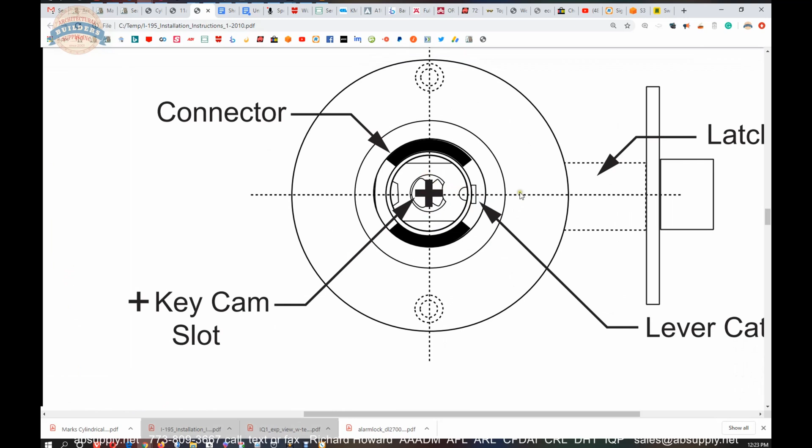So the problem is, in a key and knob lock, you'll notice that this tailpiece is vertical. When you hold that cylinder, that's vertical. Well, imagine if you rotated it 90 degrees and now it's horizontal. Key and knob locks are horizontal.

Well, in reality, so are key and lever locks, except that in a key and knob lock the cylinder is held vertical, but in a key and lever lock you rotate that cylinder so it lays on its side. The tailpiece has to always be horizontal when it enters the lock.

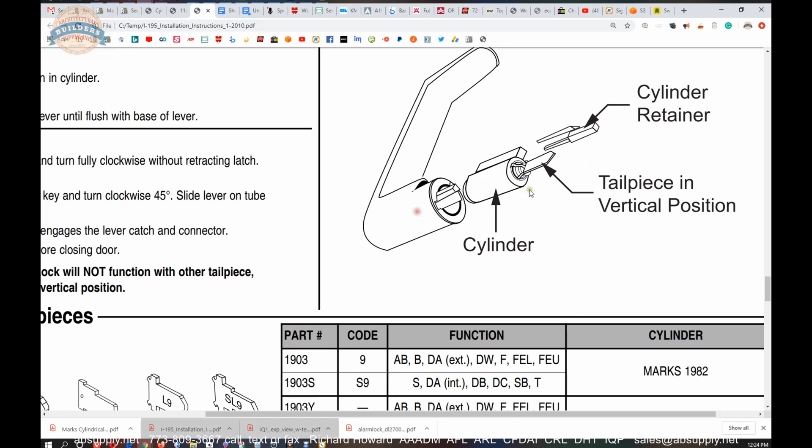So if you installed the tailpiece with the cylinder in its proper vertical position horizontally, and then you turn the cylinder 90 degrees to get it in the lever, now that tailpiece is in the wrong position - it's going to reside vertically, and you can always depress that lever catch. So that's what I would be looking for in that regard.

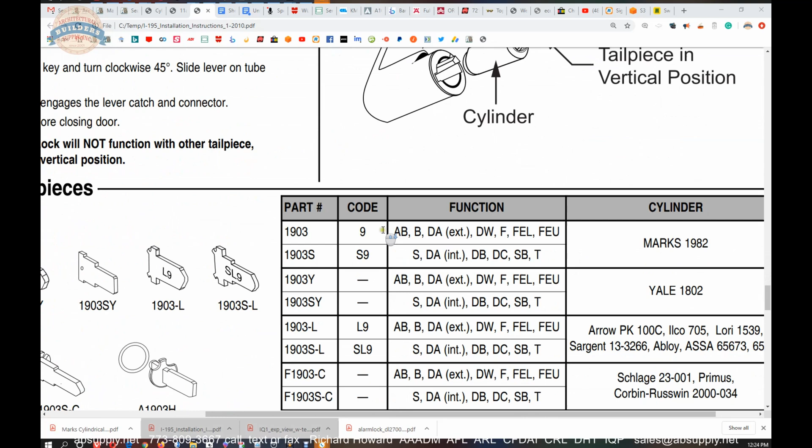Or you've got the wrong tailpiece, meaning, as I mentioned earlier, these tailpieces are substantially wider. If you had a standard skinnier tailpiece, you might be able to pull that lever off without using the key.

The latch won't retract, probably because the latch is not connected into the retractor, or your door alignment, or the preparation in your door is so out of tune with the template that the latch is binding. Keys bind in the lock - that's probably because the lock is too tight on the door, I would say. Lever catch not fully engaged - yeah, if the lever is not thoroughly seated onto the stem, the lock's not going to operate fluidly.

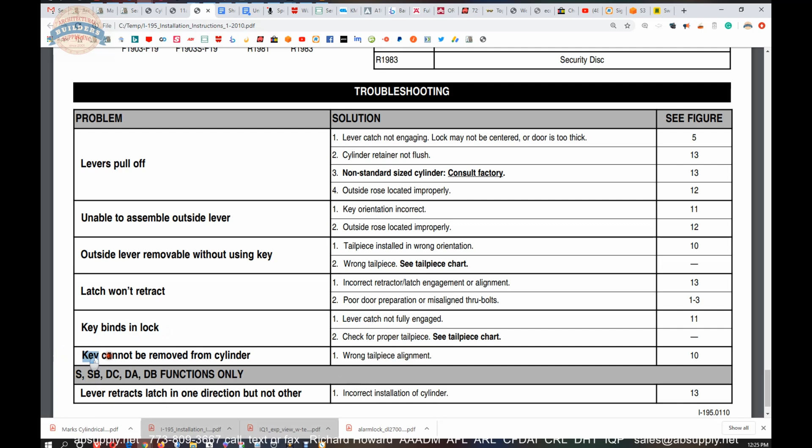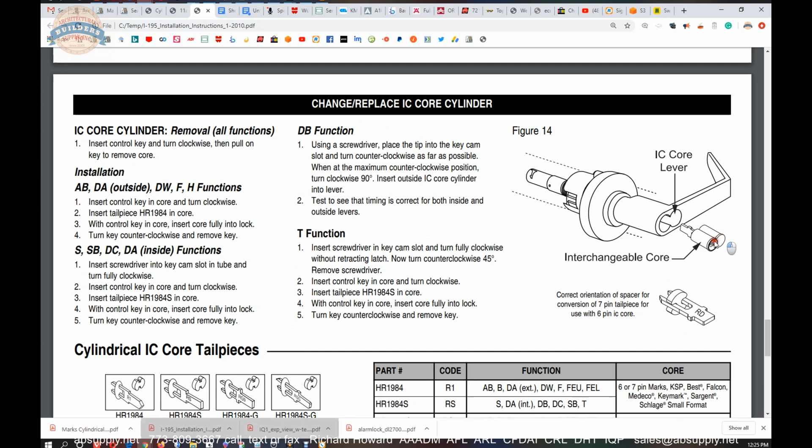Lever retracts latch in one direction but not the other. Okay, yeah, so the S was the classroom function.

Incorrect installation of cylinder goes back to a timing issue of needing to basically take that cylinder out, rotate the part with the plus sign on the inside of the lock, generally 90 degrees, and then test it again, or maybe 180 degrees, depends on what exactly the trouble is.

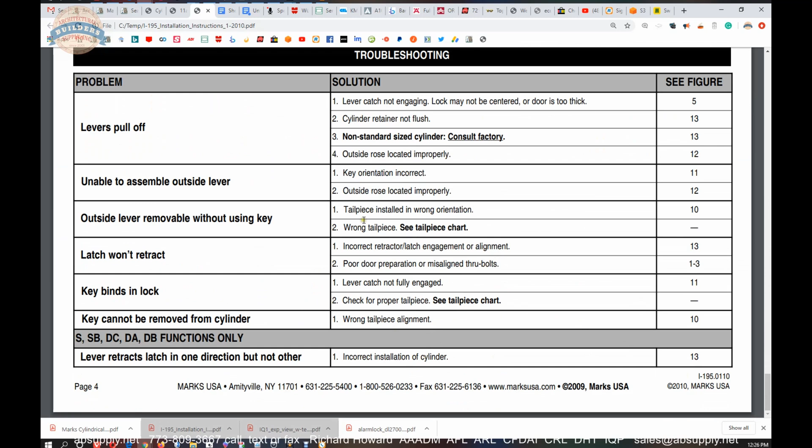But that's a nice little set of installation instructions we've gone over here, and that does exhaust all the documentation available for this lock. So let's finish up this video on camera.

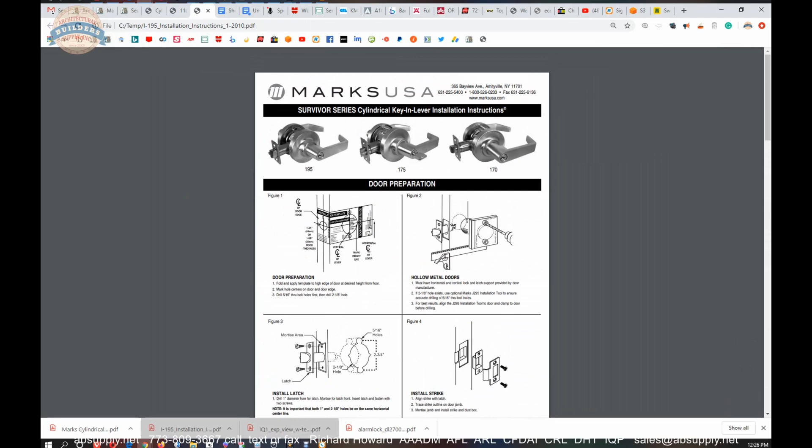Now, I personally don't have a lot of experience with Marks locks directly, but we do distribute their product. The width of that tailpiece is 0.322, so you can see that's quite a wide tailpiece, and your tailpiece is going to need to be the proper width to get that to work.

That Kaba or that Yale version, whatever the L9 was, 0.32. Yeah, so they're wider than the average tailpiece. They're counting on you probably sticking a Schlage original cylinder into this, or the threaded cap style Kaba key and knob cylinders, which should take that tailpiece as well.

Seems like a nice quality lock. It's obviously a lock that there are definitely people in the world who like Marks locks and prefer them, and I have no argument in opposition to that at all.

I have called the factory before. I actually called them to find out what G3 meant, even though it was quite clear in front of me. Very, very easy to get a hold of, very expert. The gal that I spoke to, gal, guy, doesn't really matter, did need to refer to the document, and I thought to myself, yeah, I wouldn't remember 100 extensions either.